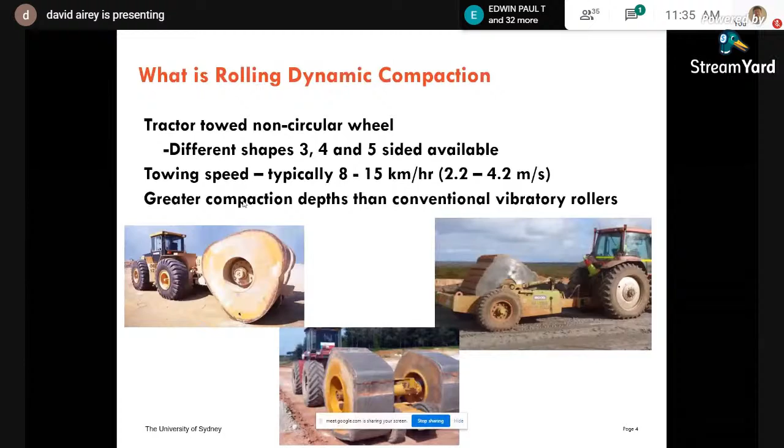So why the need for research? Because these things have been around for a while, the problem is a practical one. If you're an engineer on a site and you have to consider what type of compaction equipment to use, you're normally going to be suspicious of the construction company trying to get you to use their particular device. This is essentially what happens with rolling dynamic compaction. It's promoted mainly by Landpac, but there are other companies who will tell you that it will work on your site almost irrespective, but how well it will work is never really clear. You're relying on experience with similar sites so they can be confident it will work. So we have an absence of any sort of theoretical approach or analytical method.

The consequence is that, because generally this is being used on fairly big construction sites - it wouldn't be used on a little residential plot - still the cost of running a field trial is large. You've got to do the trial, you need equipment to come to the site, there's instrumentation required, and then you've got to assess whether it's achieved the objectives. So this is costly, and because this is seen as almost step one in this process, it means rolling dynamic compaction is not used anywhere near as much as it could be.

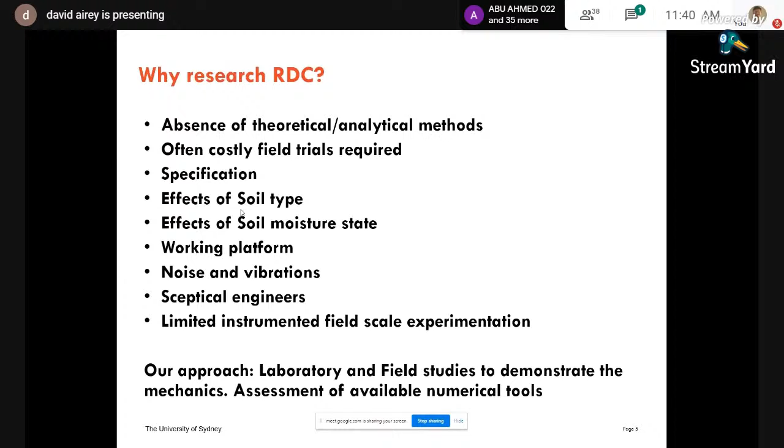So that's sort of where we started. We were basically approached by Broons - I'll say a bit more about that in a minute - and what we set off to do was laboratory and field studies to try to get more data to understand a bit better what was going on. Then there's some numerical analysis which was done as well, to try to go from the specific to the more general situation.

Just a bit of background on compaction. I wasn't sure what you know, but I'm assuming everyone knows what compaction is. It's the most common ground improvement technique, widely used because it's very cheap. The equipment is widely available and comes in all shapes and sizes. One of the things that happens with normal compaction is that you are preparing the soil for compaction.

So on a typical road pavement type project, or even on a small plot, you would be preparing the soil, controlling the moisture content, doing some tests of the soil type, and putting it down in small, thin layers, and then compacting it. Depending on the energy and the size of the site, you can use bigger or smaller machines.

So that's the normal process, but it's limited because you have to use these thin layers. The normal technique for a big construction site is a vibratory drum roller, and I'll come to how they work in a second. The problem is if you have deep in situ soils which are weak for some reason, you don't want to dig all the ground up and relay it in layers. That's very costly, so some other ground improvement is required.

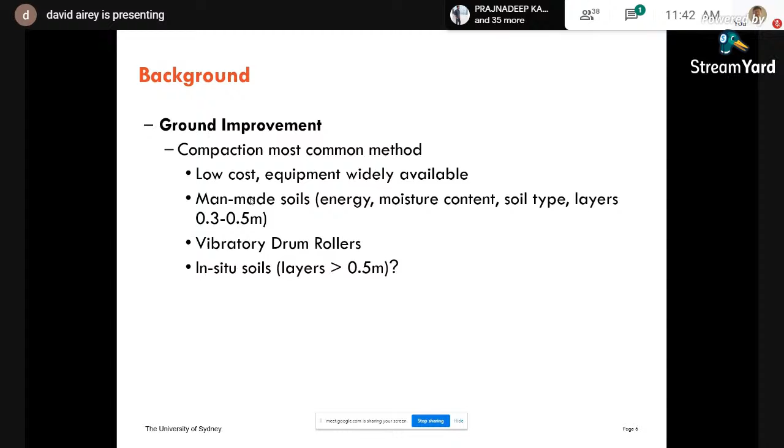This is really where impact compaction type machinery comes into its own. But we're going to talk a bit about vibratory rollers, drum rollers, to start with. Here's a picture, a bit out of focus, of a vibratory drum roller. I'm sure these are common in India too. This is the standard machine for compacting soil for roads, railways, and that sort of thing.

What may not be so clear is that they have a little eccentric mass inside the roller, which accentuates the compaction effect. It's obviously a heavy machine - these typically weigh 10 tons or so. But they have a little mass inside which goes round at quite a high angular velocity and creates extra force on the ground.

So if we think about what that vibration is doing - this is getting us onto the rolling dynamic stuff in a minute - to understand how it interacts with the ground, we have to idealize the ground. So we have a spring and a damper, and we can treat this whole system as a single degree of freedom system. You may have done something like this in your mechanics study. Then we get a picture like this of amplification against frequency ratio.

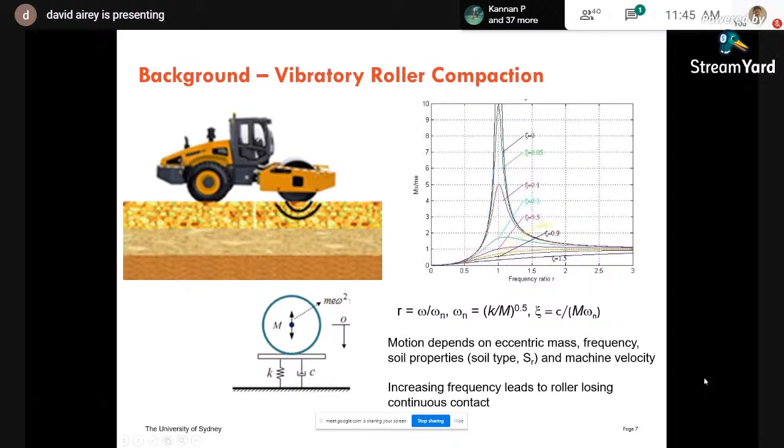Here's a picture from Adam, who's from Austria and has done a lot of work on these roller compactors. The interest here is in controlling this by some fancy algorithm on the drum, by controlling the speed of the rotating mass to optimize the performance.

So if we just concentrate on what happens in the middle here, this is the interesting bit. If the mass is going around slowly, the drum is in continuous contact with the ground, and we get some sort of contact force like that. As the rotating mass goes faster, you get a bigger force on the ground, but it also starts to lift off - those little gaps here.

And if you keep going, it starts to jump. In principle, this is the optimum place to be to get the biggest compaction effect from your vibratory roller. But it's not so easy to actually control it to be at this point. If you go too fast, the roller starts jumping around - it rocks from side to side, and you get very uneven forces occurring, and then finally it becomes chaotic. So this bit at the bottom here is no good. This is the challenge.

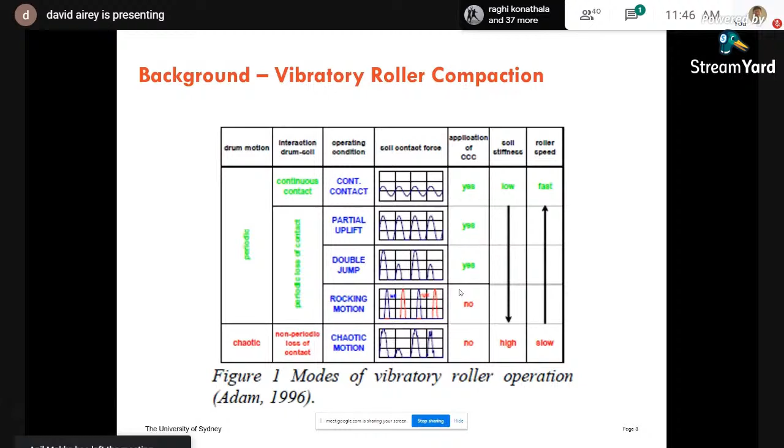Okay, so if we want to go beyond that, we then come to some sort of dynamic effect. I've just mentioned conventional dynamic compaction, and then we'll focus in on the rolling dynamic.

This is conventional dynamic compaction, where we have a big weight dropped onto the surface of the ground. Previously with vibratory rollers, we could compact maybe 0.3 of a meter to half a meter at most. With these big weights, we can now compact depths of up to 20 meters. 10 meters is typical, but with enough weight, you can get compaction effects all the way down to 20 meters. So it's a very cost-effective technique, but we're going to have issues with vibrations.

The vibrations are going to be created in the ground, and they're going to travel through the ground, which means you can't really do this anywhere near any built-up areas or where there's any services in the ground. So this is the big limitation of this technique.

In terms of how does it work, well, no one really knows. That is the answer. But there's been quite a lot of field studies, and there's this magic equation which says the depth of improvement is the square root of the weight times the height you drop it times some magic number n. And n varies depending on soil type and the position of the water table. These are the sorts of numbers you're looking at, between 0.3 and about 0.8. There's a big table here, but you'll see most of the numbers are in that range, 0.3 to 0.8.

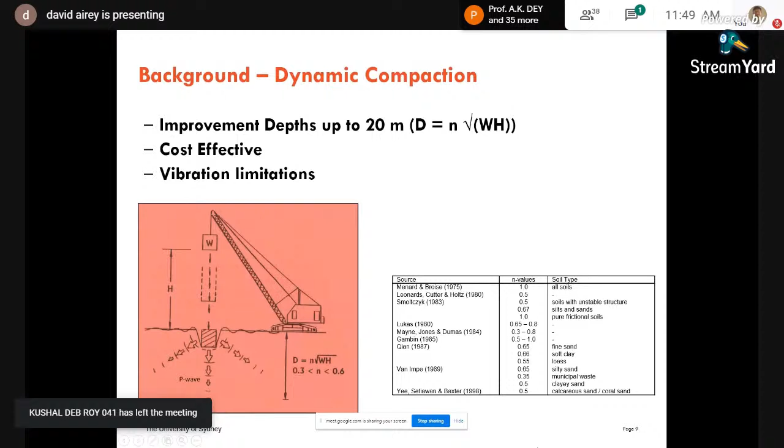So we started off looking at dynamic compaction, to see if we could understand a little bit better what was going on with it. And just to show you what it actually looks like in practice.

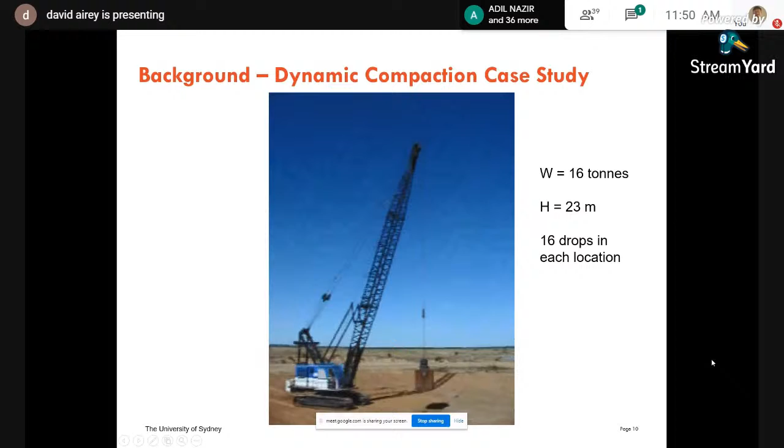And sometimes, what you're trying to achieve is compaction, so you're expecting the ground to settle. But the observation was that a lot of the time, the ground surface actually heaves up. So this is obviously not a desirable outcome.

Okay, so we are facing one of the big problems with geotechnical engineering generally, is that we're at the surface and we really don't have much clue what's happening at depth. So there is surprisingly little data on dynamic compaction, even though it's widely used, about exactly how well it works.

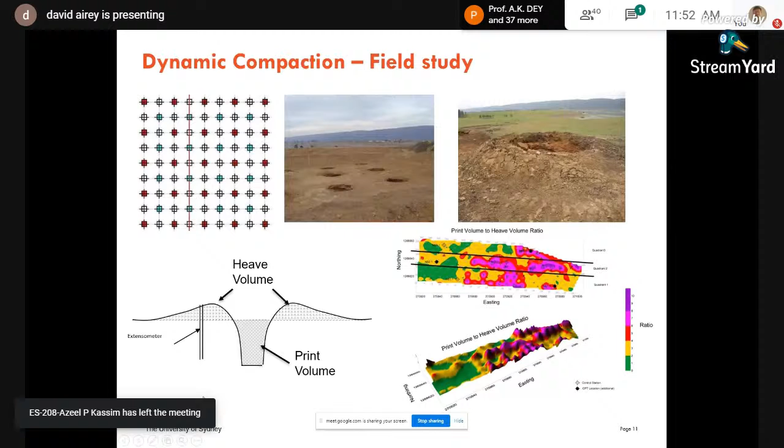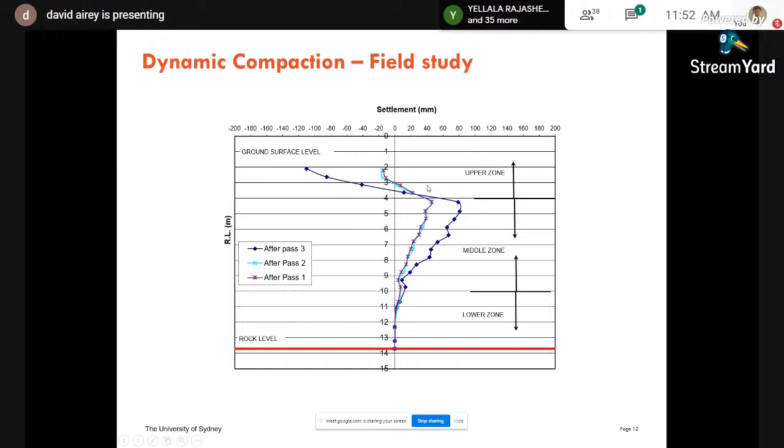So what you see is that near the surface, you get the soil heaving, so we don't have compaction at all, we have in fact the reverse of compaction, the soil is actually loosening up near the surface. But then once we get down a bit, down here in this case to 4 meters, then we have a fairly significant effect down, and here was rock at 14 meters. So a significant compaction can be achieved, but we have this problem near the surface where the soil isn't getting compacted.

Another thing that was done at that site - I mentioned the issue with vibration - that site in Western Sydney was a very large gravel extraction site that had been used for 30 or 40 years, and they were trying to make it suitable for residential construction. So it had a quite deep deposit of uncontrolled fill, and there were no buildings or infrastructure anywhere nearby, so vibrations weren't really an issue there.

But this is the sort of data you get, and there's a curve here from Mayne in the US who'd looked into this problem before, and the results agreed with the published data. If you look at this table at the bottom, we're plotting peak particle velocity against distance from where you're dropping your weight. We really need to be having peak particle velocities of 5 or less to avoid any sort of damage.

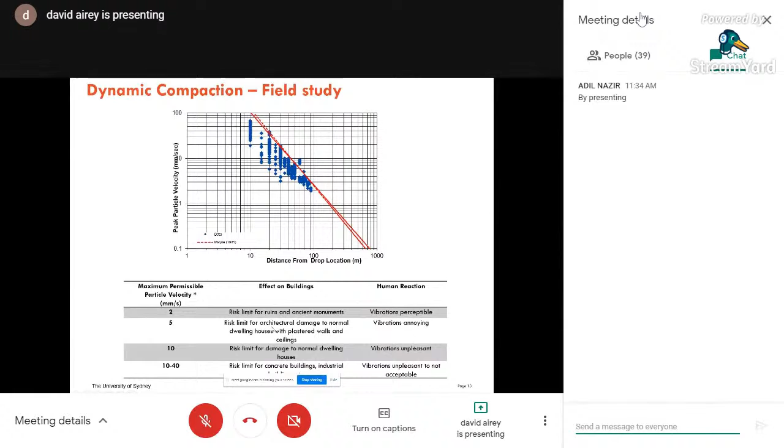And also, of course, there's damage to things that are buried in the ground as well. So if you look at this, and go to 5 and come across here, you'll see that you have to be 70 or 80 meters away from this weight dropping on the ground to avoid damage. This is an issue with impact compaction, and it's an issue with rolling dynamic compaction too - I'll come back to that later. But just remember this chart: we need peak particle velocity down below about 5. That controls how close we can operate to existing infrastructure.

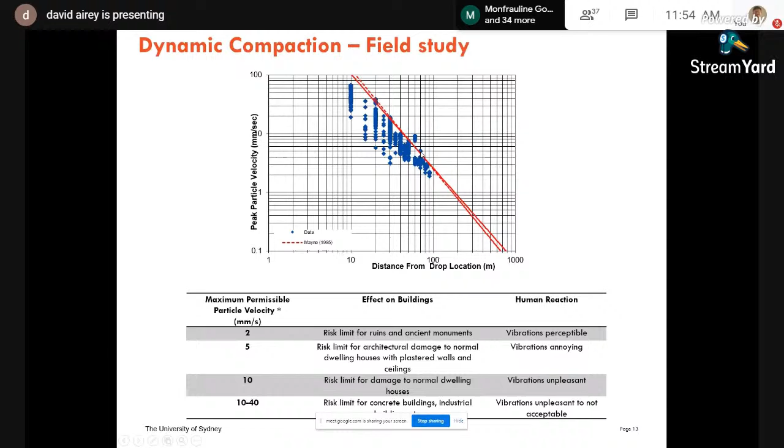Okay, so we've talked about rollers - conventional vibratory rollers - and dynamic compaction. I'm going to spend the rest of this presentation talking about the rolling dynamic compactor, which you'll see here is also called high energy impact compaction. There's a couple of other techniques that are sort of in this group.

There's a thing called a rapid impact compactor. What happens here is there's a big lump of steel which sits on the ground, and then there's a jack that applies a cyclic load. You get the compaction from this cyclic load, and this machine is relatively mobile and moves around the site. It's obviously not as quick as the tractor, but it can cover a fair area quite quickly, and it's similar in terms of the depth it can compact the soil.

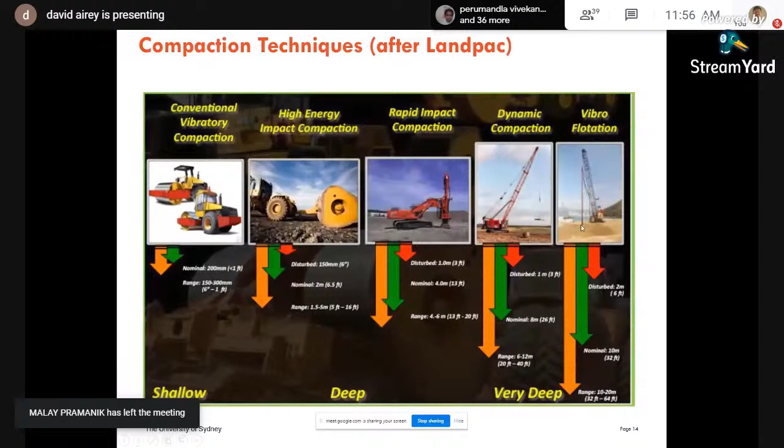And then at the other end we've got vibroflotation - that's a rather specialized technique where you're filling up the hole with stones and things to further increase the compaction. We're not going to talk about this one, we're just going to focus on the rolling dynamic compactor.

Okay, so a bit of background. Rolling dynamic compaction has actually been around for quite a long time. It was first developed in the late 1940s in South Africa, where they have a lot of trouble with collapsing soils - I'm not sure exactly what the cause is, but they have a number of issues there with collapsing ground. This was for a pavement type application, and the idea was they could use this heavy hammer, put it on a tractor. It took some time before the work got noticed by anyone else - from the late 1940s, it wasn't until 1971 that the first paper was published.

So quite a bit of development happened in that time. Then there was a master's student, maybe even a PhD thesis, by Clifford, where people really started to take notice. Still not much happened, but what did come from this is that the device developed in South Africa had its patent purchased by Broons in Australia. Broons produced rollers for a whole load of equipment for compaction and pavement construction, so they saw this as just an extension of what they did, and they invested in some of these roller compactors. Eventually Landpac, who are probably now the biggest company doing this, developed their own device. So although it started in the late 1940s, it wasn't until the 1990s that this technique really started to get used in much of a way.

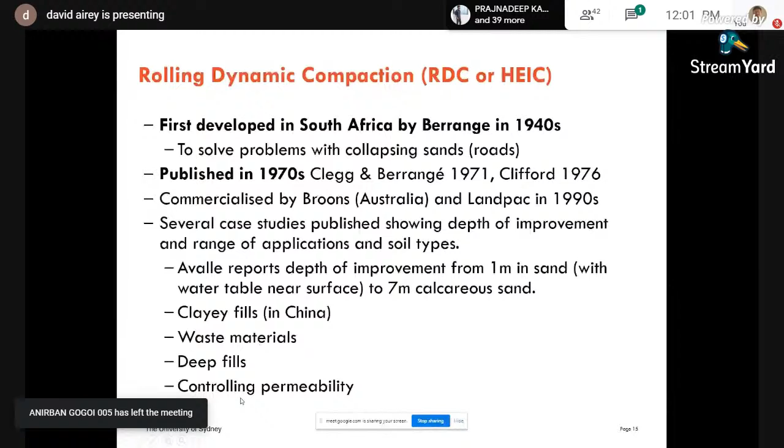Another one was the mine sites in Australia. They had trouble with the tires on the big mine machines getting damaged by the road surface, and it was found that rolling compaction, because it basically crushed the material quite effectively, it ended up saving them lots of money on tires. So there's a sort of range of applications.

Okay, so just before we get into what we've actually done, let's take a minute to think about what is the aim of compaction.

As it's taught in most soil mechanics courses, the whole idea is to get to the maximum dry density, and to do that you need the soil at a particular moisture content, the optimum moisture content. That's seen as a target, and if we get most soils to that state, where we do a standard compaction test, then we expect to get reasonable performance. Now, there's a lot of interest nowadays in stiffness rather than density.

One of the problems with compaction is that density is quite hard to measure, so people have moved on to measuring stiffness rather than density. Of course, stiffness is one of the key benefits of densifying the soil, and ultimately we're trying to reduce the surface settlement. So we just need to remember these are the things we're actually trying to achieve - it's not just about compaction as such. Also, reducing the permeability is often quite important in construction.

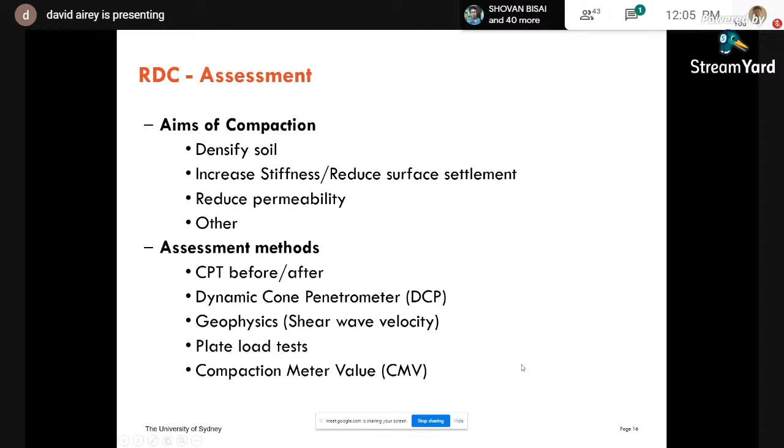But the thing to see is that none of them actually measure density, which is number one what we're trying to do, at least not directly. CPT certainly doesn't, dynamic cone penetration doesn't. Geophysics, in principle, can measure density - we're measuring the velocity, but shear wave velocity depends on the stress as well as the density, so it's hard to pick density. Plate load tests are also indirect, and compaction meter value is definitely a very indirect measurement.

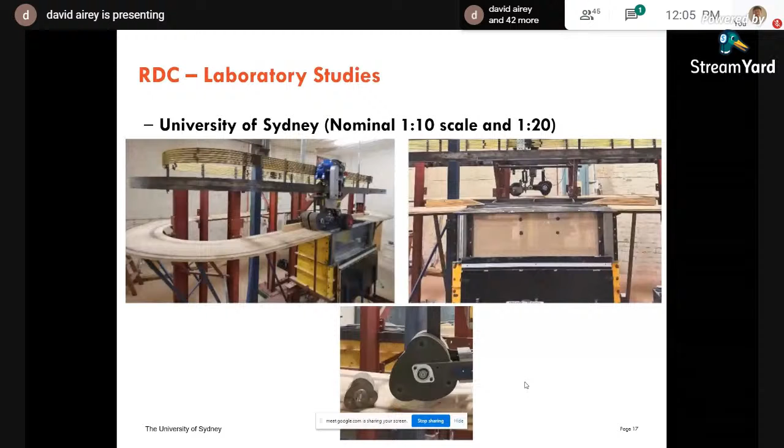Okay, so what has been done? I'm not going to explain everything, but as you saw, a very large number of people have been involved in this project. I'm going to show you some results from a current PhD student at the University of Sydney, what he's doing, and then we'll look at some field tests done at the University of Adelaide.

So this is our setup. We have a model scale here, roughly 1 to 10 scale of the device you saw before, which we are pulling around. We have a motor that drives this wheel, and the wheel tows this along behind it. One important thing is that it only rotates by friction—this wheel is not being driven at all, it's just on this axle and relies on friction with the sand to make it rotate. This is important, as we'll see in the results.

This is our tank, which we fill up with soil, and we're taking various measurements of the soil in there. We've also done some tests with a 1/20th scale, so we've got two different sizes that we've been looking at.

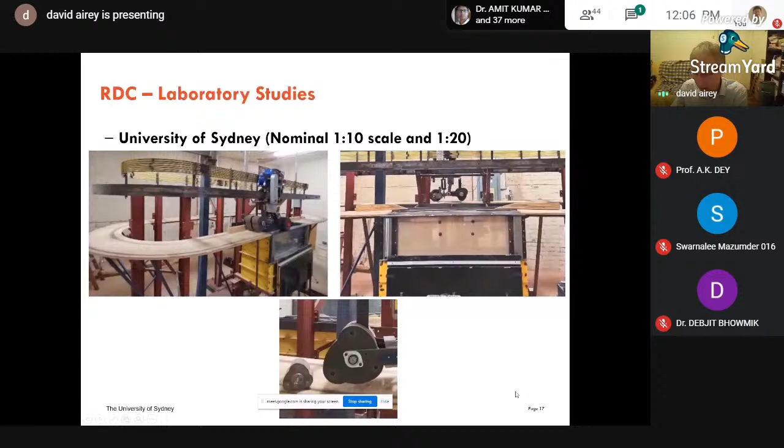This is what they've been doing at the University of Adelaide. The device we've been using at the University of Sydney is copied off the Landpac device, which is a 3-sided roller. But at Adelaide, they've made a copy of the Broons 4-sided roller—essentially an almost perfect copy, including this spring-driven mechanism, which is at least claimed by the manufacturers to improve performance and increase the impact on the ground.

The principle of the thing is similar. They have a tank of sand, and this device gets towed—they've just got a wire that connects to it, and they tow it along across the surface of the sand. Then there's a whole lot of instrumentation in the sand to measure what's going on.

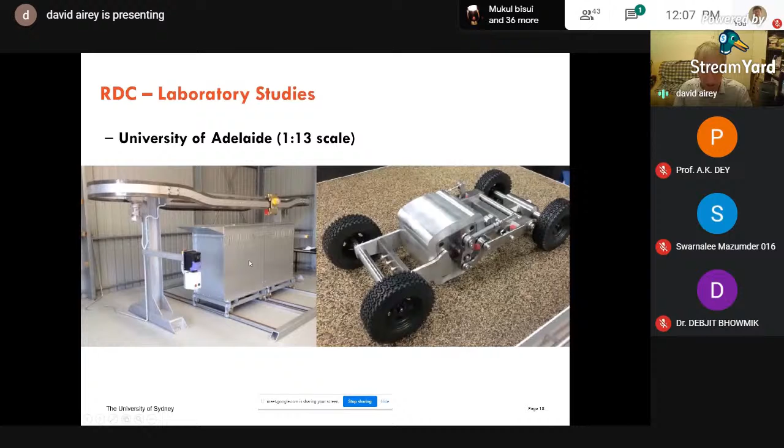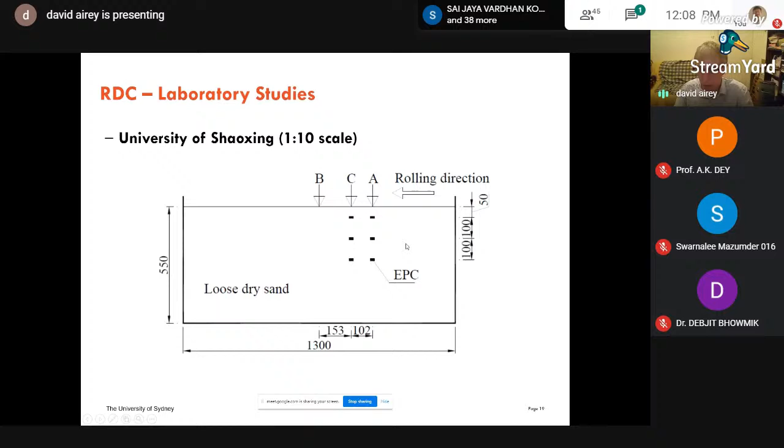I should also mention there's another person doing this in China at the University of Shaoxing. The apparatus looks very similar—there's a big tank of sand, and in this device there's a wheel that starts here and goes to the end, then lifts off and goes back. So it's not on a circular track like the ones we have in Australia, but the idea is pretty much the same. I'll be talking about some results from this later on.

So we've made a number of measurements. We've looked at surface settlement, we have buried settlement plates, and we've measured the soil movements on the front face—I'll explain more about that later. You might have noticed there was a perspex window on the front of the apparatus, so we are actually looking at the sand movements behind that perspex face.

At Adelaide in particular, and in the field tests, there's been a lot of work on the stress distribution—burying pressure cells, so earth pressure cells, miniature ones buried in the ground, used to get the stress with depth. There's also been tactile sensors used to get more than just a point measurement, to get it over an area. And there's also been accelerometers, often connected to the pressure cells, so you can get not only the force but also the movements at the points of interest.

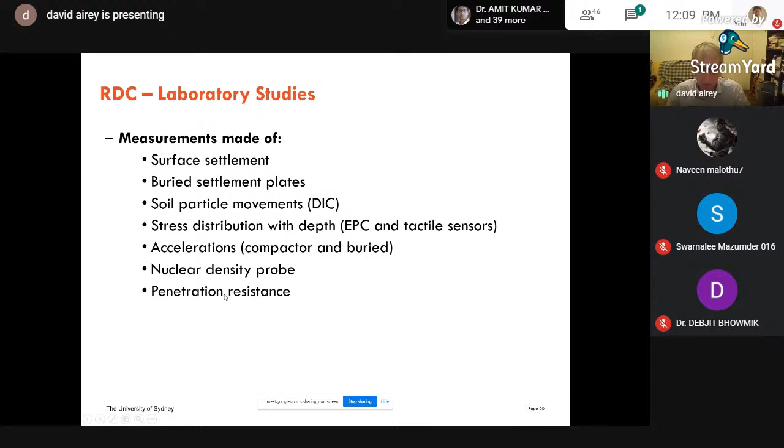There's also been some nuclear density probes used, which in line with current practice is the gold standard of estimating how effective your compaction has been. And we've been measuring penetration resistance as well. So I'm going to show you some results now to get a sense of what actually happens.

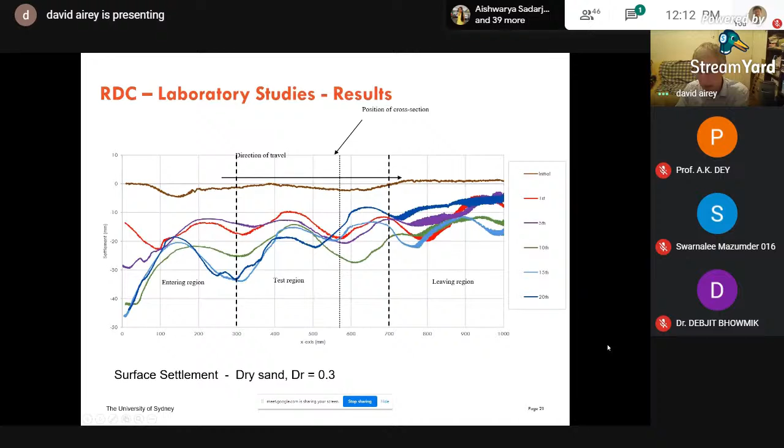Now we're going to take pictures sort of looking into the page here, if you will. So this is the cross section. This is where the compactor wheel is running, and this is the other half of the tank behind it.

What you can see is it's pushing the soil up. So initially it goes down, but then as you keep going, the compactor is actually pushing the sand up, and we're getting this heave of the sand beside the track. Just as we saw with the dynamic compaction in that field study with those big mounds of soil, we get the same sort of thing happening here.

This is loose sand, so mostly it's compacting, and the heave is not that significant. But if you do this with dense sand, the heave here is almost as significant as the compaction you get. So you're mostly just loosening the sand in this region, meaning it doesn't work so well with dense sand.

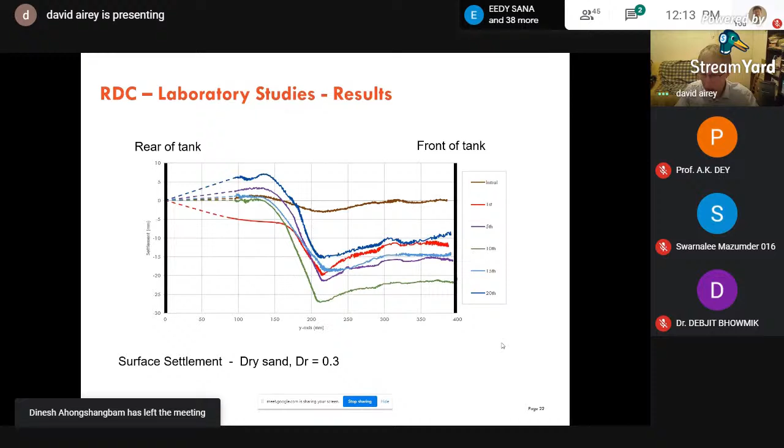So that's what happens at the surface. But there's an issue with whether that's actually telling you anything useful, because the compactor is actually pushing the sand in front of it as well as pushing it off to the side. So we've got some little sensors here, buried plates, where we're able to measure the movement of the ground beneath the surface. This is what you're seeing here.

We can see the settlements building up over time, and it looks like it happens in a fairly steady way. But notice that we've got these discrete points, and each time the compactor runs along here, it hits in a different place, and it almost certainly doesn't hit directly over these plates. So what we can see is that we are indeed compacting the soil at depth reasonably well, even though at the surface something funny may be going on.

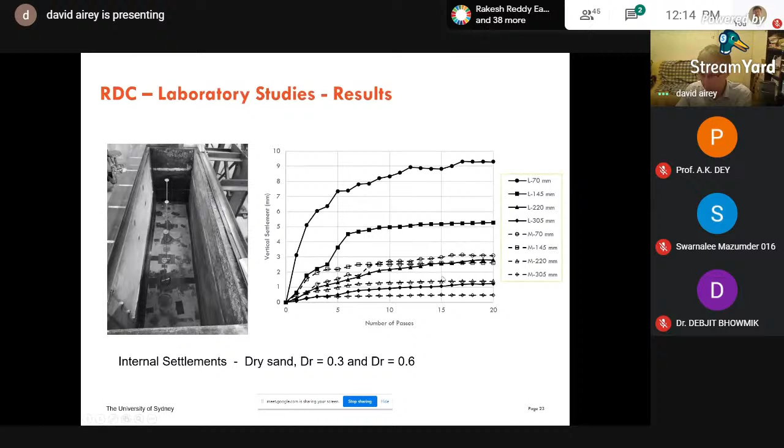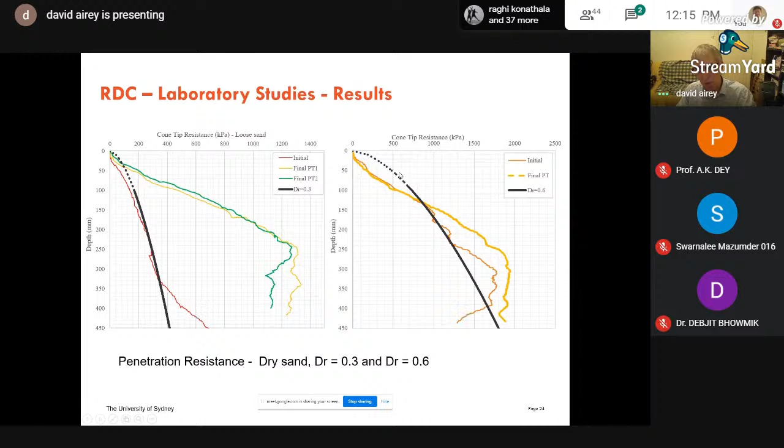Okay, so some penetration tests. This is the loose sand, so this is our initial penetration, and this is after 20 passes. You can see the penetration resistance has increased significantly. This is for initially dense, medium dense sand, relative density of 0.6 - this is the initial curve, and this is after 20 passes. Here we're having a big effect, but with medium dense sand, not very much - we're still getting a bit of densification at depth, but really nothing near the surface.

The trouble with this is that although we can do this for our laboratory tests, this isn't all that useful in the field, because we don't know what the appropriate fitting parameters are. Relative density is not easy to determine from cone penetration tests.

Of course, we're assuming here that we've just got purely vertical movement, and we've seen that the soil is not moving purely vertically. So the plates, we think, are less reliable, but it does sort of show some of the challenges with trying to understand exactly how much densification you're getting.

Okay, so that's one of the big issues is, we can show we're getting densification, but how much? And can you predict how much?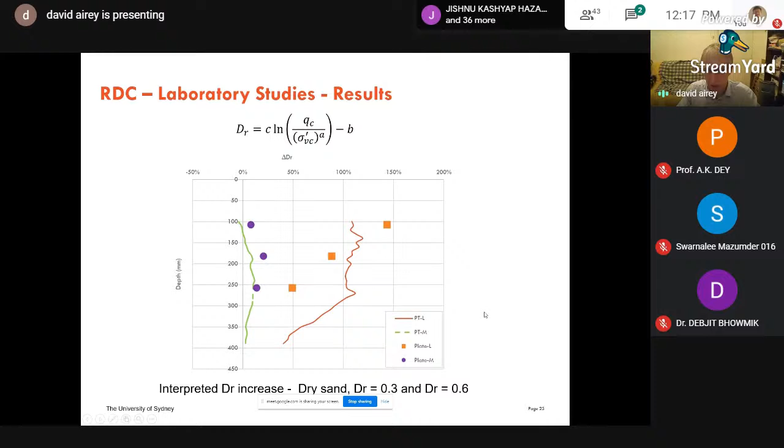Okay, so I just want to say a little bit about the photography. This is just for Professor Dey, because this is what he did when he came to visit us in Sydney. So we've carried on doing this.

So we have a high-speed camera here. We're taking 1,000 frames per second as our wheel rolls across the top. And then we've just got the sand behind a perspex window, and we're looking at the movements of individual sand particles. Lighting is obviously important so that you can actually distinguish the sand particles in your picture.

And then we're using something called digital image correlation. You're probably not familiar with this technique, but basically you look at 2 pictures and get a pattern. What you do is shift one picture relative to the other to find where you get the best match. This gives a correlation between the 2 pictures, and what you're hoping to see is a nice peak, which is where you have a very good match. Then you can determine how much you had to move picture 1 relative to picture 2, and hence you can get the displacement. So that's the idea behind it.

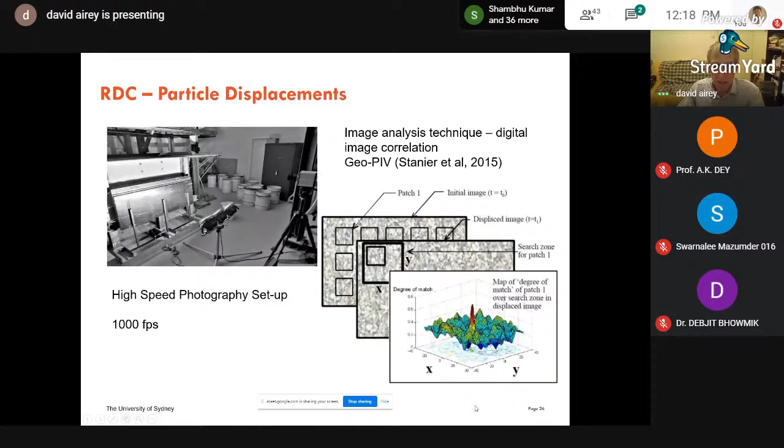Okay, so I've just got a couple of slides of pictures of this. This is what you see as the wheel is rolling around. Okay, so it's an impact compactor.

So this is the impact happening here. You can see at the impact, it forces the soil down and also off to the sides. This would actually come up as well a bit, but we've obscured the top, so we can't see that.

And then as the thing keeps going, the wheel is rolling around this way. So when we come to this picture, what was here is now here. And what you can see is it's now pushing the sand in front of it.

Okay, so we're pulling on the axle here. The thing is rotating just due to the friction, and we have a frictional force which has got a component horizontally. So the sand gets pushed in front of it. There's really no compaction happening at this point.

Then we come to here. Okay, so now we've just gone around a bit further, and at this point the axle is at its highest point, and you can see there's almost nothing happening in the soil. There's, due to the rotation, an upwards force here, which is acting against the weight. So no movement in the soil at all.

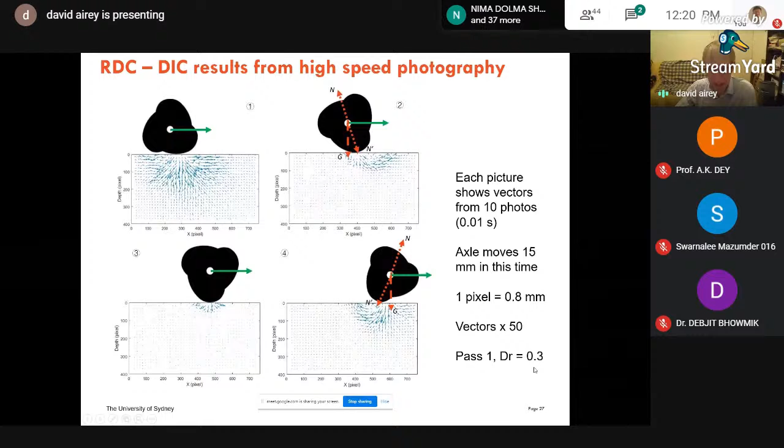Okay, so this is just to show you what happens if we just keep going. The idea is we look at a whole cycle, from one impact to the next. Then you start to see that despite the soil moving backwards and forwards, there's a significant region down here where the soil is being pushed downwards.

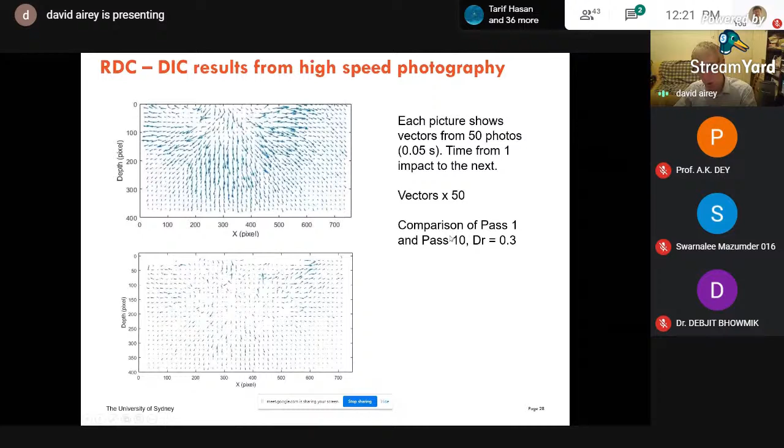This is in the first pass. This is the same picture in the 10th pass. What you can see is that there's almost nothing happening at the surface here, because the soil is, by this stage, mostly going backwards and forwards, but there's still a bit of compaction happening. You might not see that clearly, but all the vectors down the bottom are still going downwards. So you continue to get some compaction, but not much more near the surface. The soil is just going side to side, and also being pushed forwards by the device itself.

Okay, this one's just for Professor Dey. This is when he visited us in Sydney. This is what we were trying to do.

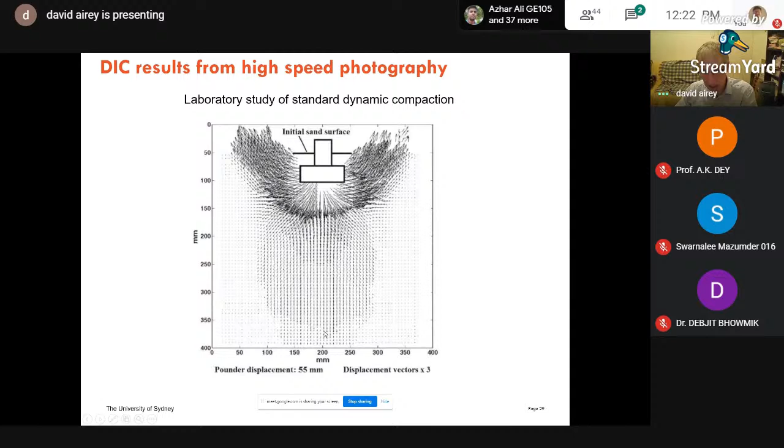This is a straight dynamic compaction with a load coming down vertically on the soil surface. The thing to see is that you get a standard bearing capacity failure near the surface. If you've done a bit of soil mechanics, you'll be familiar with that idea. Then there's this region at depth where the soil is being pushed vertically downwards. This is what we're seeing: the soil near the surface being pushed sideways and upwards, actually getting looser, and then we've got this region down here getting denser.

Okay, so I'm conscious of time. Just briefly, field tests.

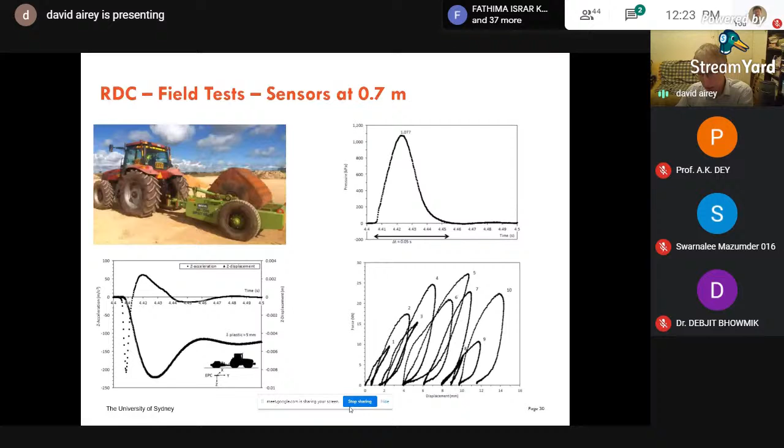Tests have been done with this four-sided roller. There's been sensors buried in the ground at different depths, and from that you can estimate the pressures - around 1 MPa. And from the accelerometer you can get the displacement that's happening, and then you get load displacement responses of the ground. You can see the settlement gradually building up as the device is passing over it.

And if you put the sensors at different depths, then you see how the stress decays with depth. We see in the laboratory the same sort of decay - it drops off fairly rapidly as you go down.

This is showing the pressure you measure on your pressure cell, depending on where you are relative to the impact and with different velocities. The important bit is that if you take these curves down the bottom, this is when we're going 5 to 6 kilometers per hour, the slowest speed these devices run at. But the target number is around 10 to 12 kilometers per hour, and that gives you this curve up here. You can see a peak pressure of about 1 MPa, dropping off as you go away from that. We're looking at 800 millimeters to either side here.

But if you go faster, so now just 13 kilometers per hour, we lose that peak altogether. We've now got this upturned result. What actually happens is that just as with the vibratory roller, things get out of control - it's not doing what it's meant to do. It's bouncing along the surface and rocking from side to side. So not only is it very uncomfortable for the tractor driver, but you also cease to get the required compaction. So there is a limit to the speed.

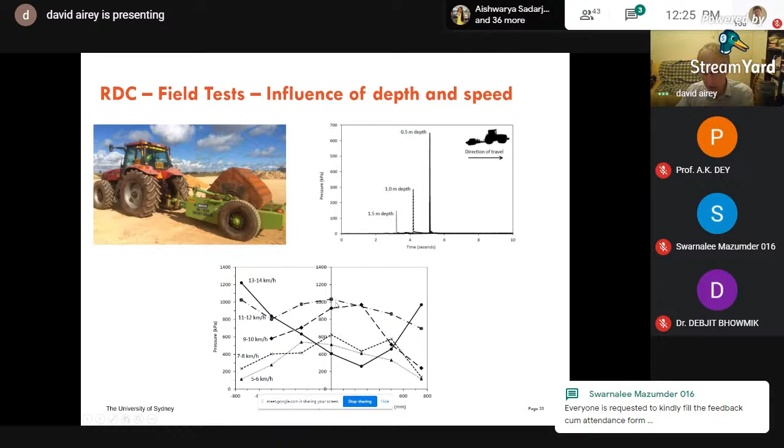This is an important aspect: the amount of energy you can put in is limited. The faster you go, the more energy you're putting into the ground, which is why the stress is going up as the speed goes up. But there's a limit, and the operators are well aware of this because the thing starts getting out of control beyond that.

Vibration - remember our 5 millimeters per second number, so that's around here. You need to be about 30 to 40 meters away, or maybe 20 meters, from other buildings and so on to use this equipment. So it's not suitable for residential sites. It needs to be out in relatively open and large sites, because otherwise you're going to have this issue with vibration damaging buildings and buried infrastructure.

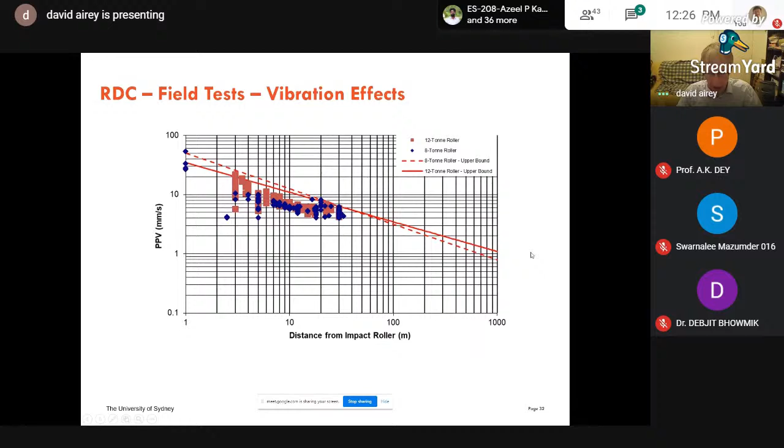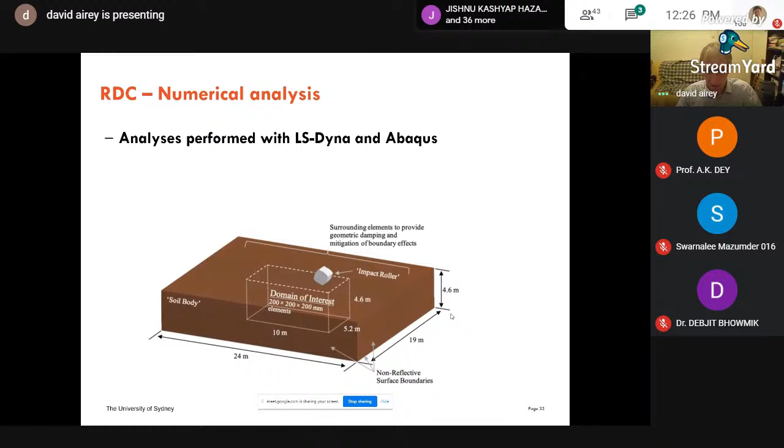People have been trying to do numerical analysis. So numerical analysis predicts stresses, it predicts strains, and I'll just show you this little picture.

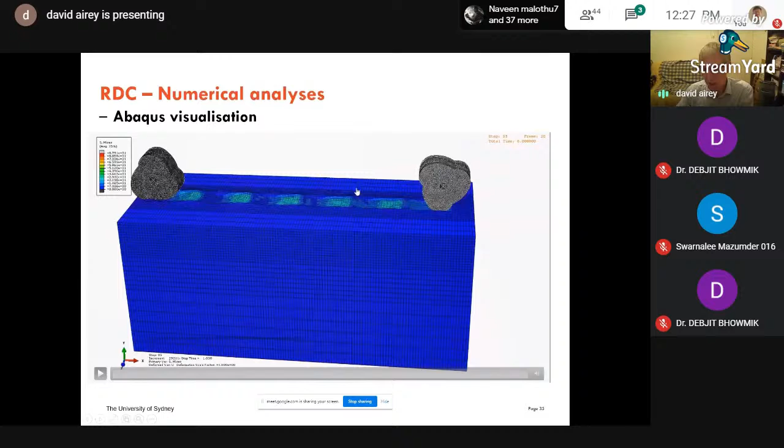And you can make this sort of thing happen. Okay, so one of the problems we have is that when we're doing this, we're actually forcing the thing to roll here, so it always hits at exactly the same point each time. So we're not actually able to very well model the friction between the compactor and the ground, which is actually important - it both limits the amount of energy that goes to the ground and controls the motion.

So although we can get some predictions, they're not necessarily all that good. The stresses and their distribution with depth agree pretty well between experiments and model tests. The numerical analysis gives rather more stress at the surface and rather less at depth compared to the experiment, but it's capturing fairly well what's going on.

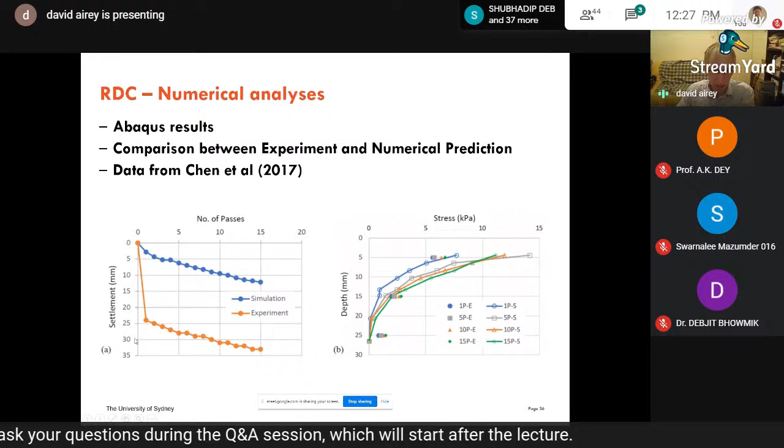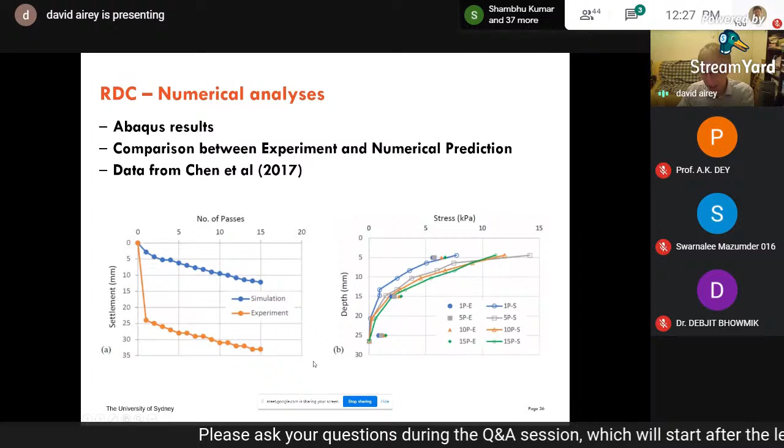But if you look at the settlements, we're not capturing this initial large settlement, which is because a lot of the sand just gets pushed out of the way. So that's obviously quite tricky to model.

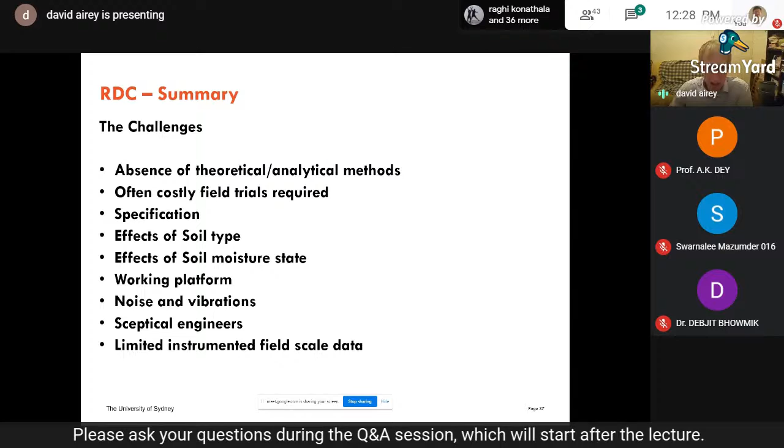Okay, so I'm just conscious of time, my hour is almost up. So just where we started, right - there were, I mentioned all these challenges at the start, so I won't go through them all again, but just try to summarize what has been achieved.

So there's been a lot of work done, both field studies with instrumentation and laboratory studies where we've tried to clearly identify the mechanism. So we have a much better idea now about how rolling dynamic compaction actually works. And what's clear is that the actual impact is the all-important bit - the rest of it is just rolling around.

Okay, so that's one of the key things - the importance of towing speed. This is an issue in terms of specifying how people go about doing this. So it's certainly shown the importance of having some control over the speed, and it depends on the soil type and other things as well. So that's clearly come out of all the research tests.

The scale, the lab tests and the field tests, basically they're all giving the same sort of results in terms of the depth of improvement and the stresses.

And a predictive AI tool has been developed. So using cone penetration data and some other information, we're able to make some sort of prediction of the improvement in the CPT result, for instance. So that's the sort of things that have been done.

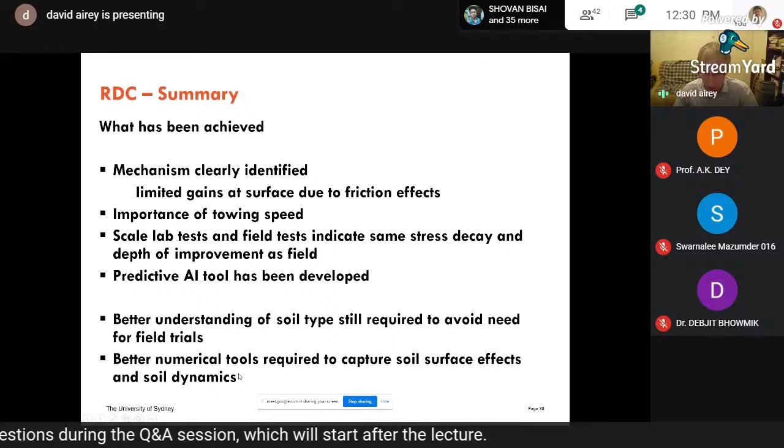However, there's still a better need for understanding of the soil type, and also we need better numerical tools, because really we can't capture the surface effects. This is a big problem in any numerical analysis. At the surface, where the stress is low and the soil gets pushed around, that's really challenging for any numerical analysis. And then there's also the soil dynamics, which is always challenging to capture, particularly when the soil is unsaturated, as it often is during the compaction operations. Okay, so that's the end of my presentation.

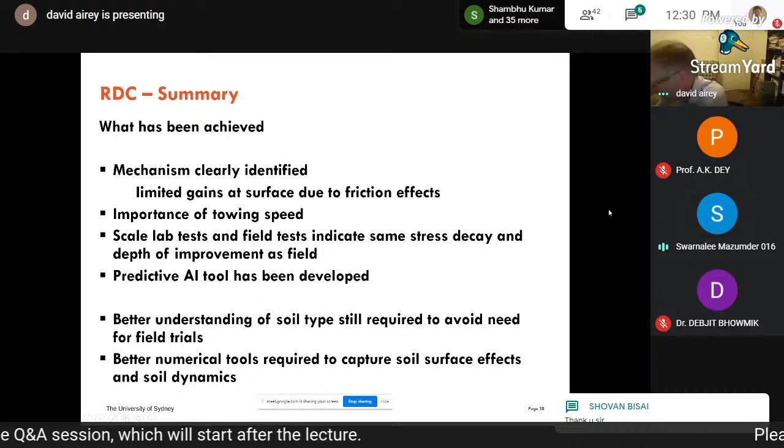Yes, sir, we have one question from Kritiman. He is asking, how do we ensure that the vibratory roller does not oscillate at the resonant frequency of the soil? Or how do we determine the resonant frequency of the soil?

Okay, look, I don't know about Indian practice, okay, but the way the rollers work at the moment is that they have basically two settings - this is the standard roller. And it either has a small eccentricity or it has a large eccentricity. So there's basically two settings, fast and slow. And when you use those settings, there isn't an issue with it going out of control.

So the out of control comes because what's happening is that people are trying to be clever and to then use computer control, ideally, right? So you'd like to optimize your compaction, reduce the number of passes by adjusting the amount of energy that goes in depending on how the ground behaves. And this is when this sort of problem arises.